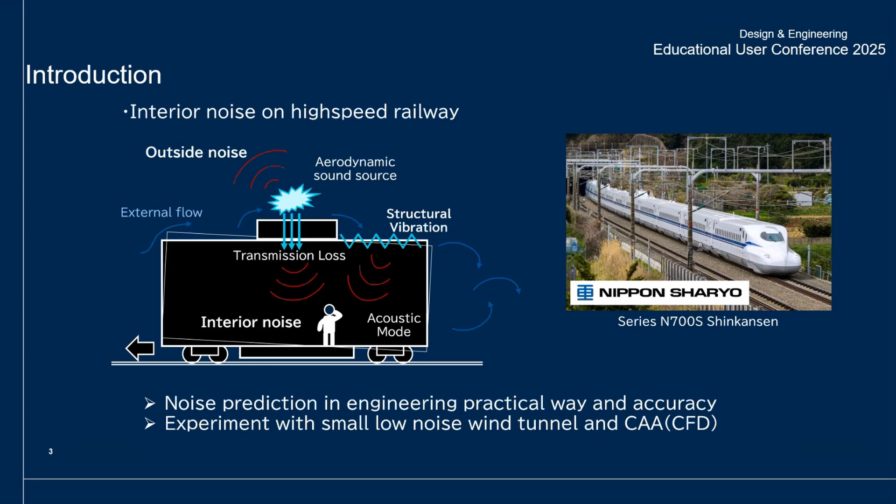Okay, figure 1 shows the experimental setup in a small low-noise wind tunnel. So this is a self-made wind tunnel in my laboratory. The goal of this study is to investigate how aerodynamic noise generated by external flow caused by various obstacles, such as roof-mounted equipment, affects the noise propagated inside a box-shaped model.

The wind tunnel used here is a self-made semi-Göttingen type tunnel with a nozzle size of 130 by 130 millimeters, maximum airflow velocity of 45 meters per second, and a background noise level of about 65 dB(A) at maximum speed. An obstacle was placed directly in line with the nozzle, and the bottom of the obstacle was supported by the top plate of the box representing the interior of a vehicle.

The airflow passed over the top plate surface, so only the obstacle was directly exposed to the wind. To simulate how aerodynamic noise generated outside propagates into the interior, microphones and accelerometers were installed inside and outside the box, as well as on the top panel. Sound-absorbing materials were also placed inside the box to prevent resonance from internal acoustic modes from dominating the actual phenomena.

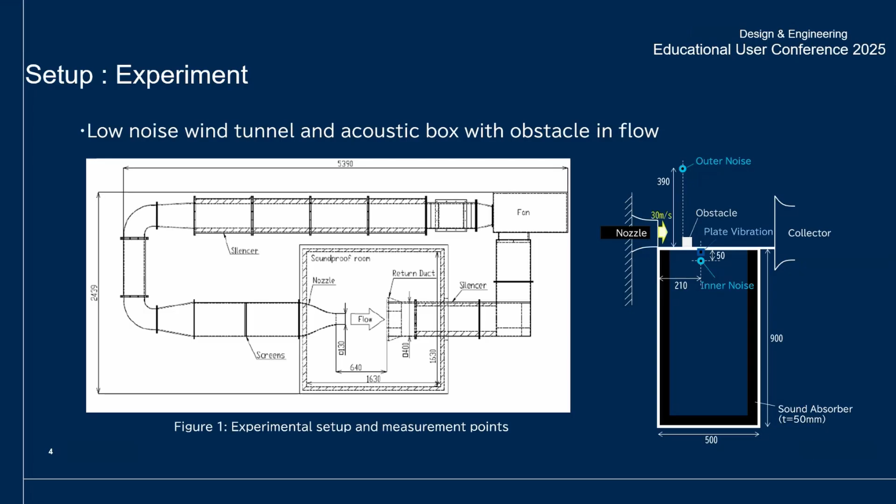And figure 2 and table 1 show the list of obstacles tested in this study. The obstacle shapes were based on a rectangular block with dimensions of 40 millimeters in length, 80 millimeters in width, and 40 millimeters in height. A 20 millimeter fillet was added to the edges. Several variations were tested and compared in front of the wind tunnel nozzle. From our previous experimental studies, we confirmed that the influence of obstacle shape can be clearly observed in the box's internal noise.

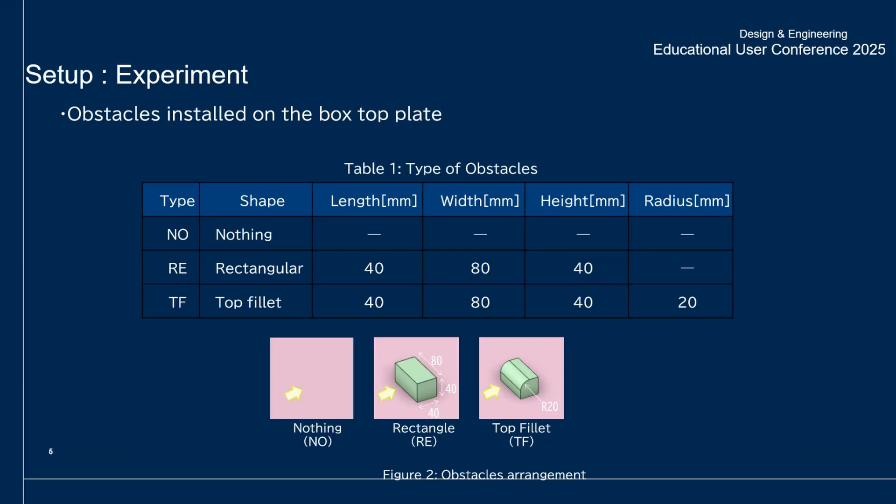Okay, this is the simulation setup. Figure 3 shows the numerical model used in this study. In this work, the CFD results were used as the aerodynamic sound source for the computational aeroacoustics (CAA) analysis. Therefore, CFD and CAA were calculated separately.

For the CFD model, on the left-hand side, only the region above the top plate, where the airflow mainly passes, was reproduced from the experimental setup. The airflow velocity was set to 30 meters per second.

For the CAA model, the area around the obstacle on the top plate was extracted as the fluid noise source region. The sound-absorbing material inside the box was modeled using three-dimensional elements with Biot parameters such as flow resistance to represent its acoustic properties.

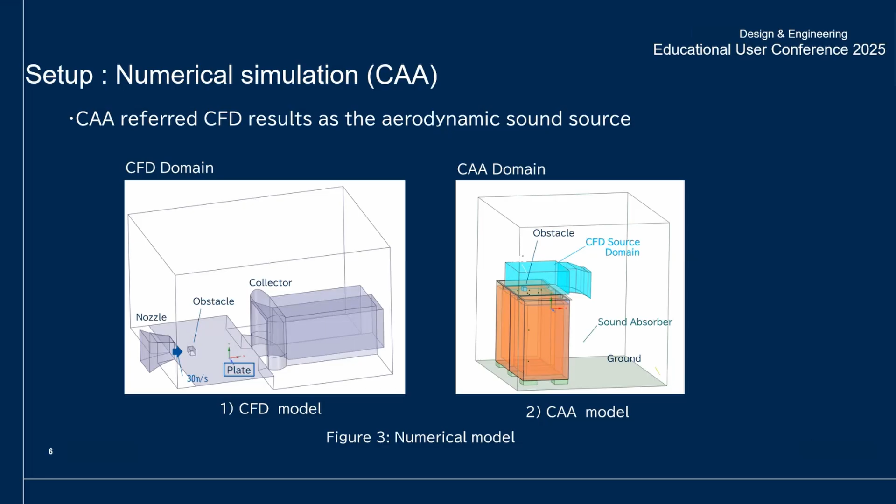Table 2 shows an overview of the simulation settings. In this study, OpenFOAM was used as the CFD tool, and Actran was used as the CAA tool. The main coupling method between CFD and CAA was SNGR, which stands for stochastic noise generation and radiation.

In this study, two approaches were compared. The first one is SNGR, a simplified method that generates the aerodynamic sound source using random fluctuations based on the average turbulent kinetic energy obtained from RANS.

Okay. The second is the normal CAA method, denoted as NCAA, which creates aeroacoustic sources from time series data obtained by LES, large eddy simulation, using the discrete Fourier transform. Actran provides a utility that allows aeroacoustic sources to be reconstructed from the CFD result and mapped onto the source region defined in the CAA model.

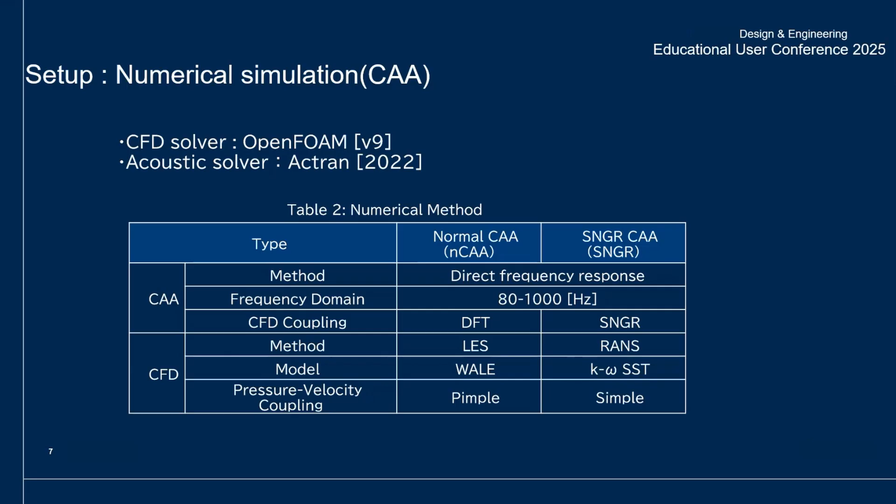Okay, let's talk about the results and discussions. Figure 4 shows a comparison between the experimental measurement and the analysis result in order to confirm the reproducibility of the prediction. With the NCAA method in the green line, both vibration and interior noise were predicted quantitatively well.

However, exterior noise, the outside noise, was overestimated, suggesting that not all of the fluid excitation components in the actual phenomenon are converted into sound.

On the other hand, with the SNGR method in the red line, the exterior noise matched the measured data well, but both vibration and interior noise were underestimated. This is likely because the vibration, which represents the fluid excitation component, was underestimated, and the SNGR method does not theoretically model the excitation effect.

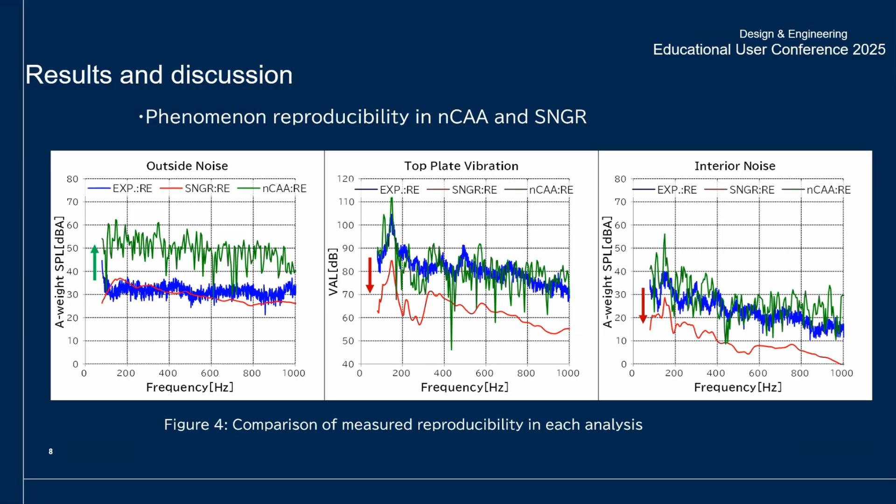Next, Figure 5 shows a comparison of the results with and without the top fillet. This is the comparison of the obstacle shape. Here, we examined whether the influence of the obstacle shape could be predicted in each simulation. For the interior noise, the noise around 160 Hz, circled here, which corresponds to the structural mode of the top plate, became dominant due to the excitation caused by the airflow.

When the top fillet was added, the fluid excitation component became weaker, and as a result, the level around the dominant frequency was reduced. Although there were some quantitative differences between the NCAA and SNGR results, both methods were able to predict the effect of the top fillet. From this result, it was confirmed that SNGR can be effectively used for qualitative prediction of the internal noise.

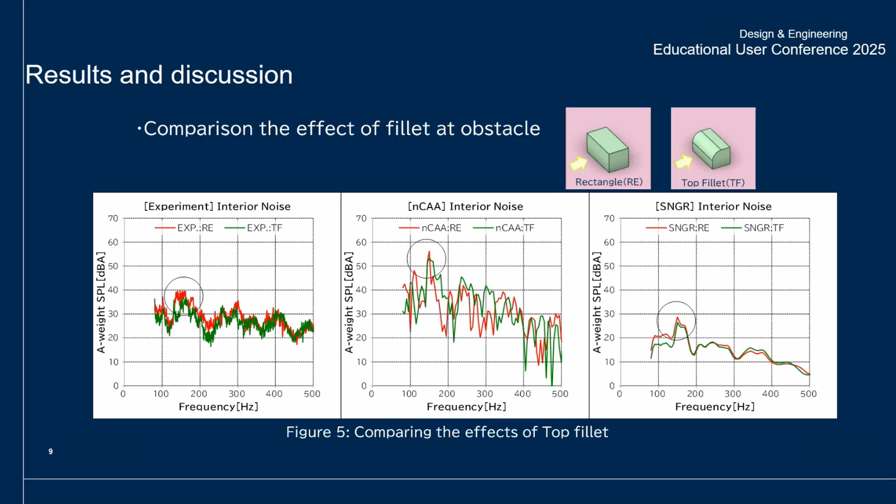Okay, finally, we evaluated the advantage of the SNGR method in terms of simulation cost. In this model, the calculation time was reduced to about 1/7 of the normal analysis, showing a significant improvement. This is because unsteady calculations were no longer required in CFD when generating the sound source.

However, the memory usage and storage requirements of the analysis PC increased compared to the normal method. This is because SNGR uses random fluctuations to generate the fluctuation component from the averaged flow field, which results in large sound source and analysis result files. To apply SNGR to real-world cases, for example, the analysis of railway vehicles, it will be necessary to optimize the setup to reduce memory and storage demands.

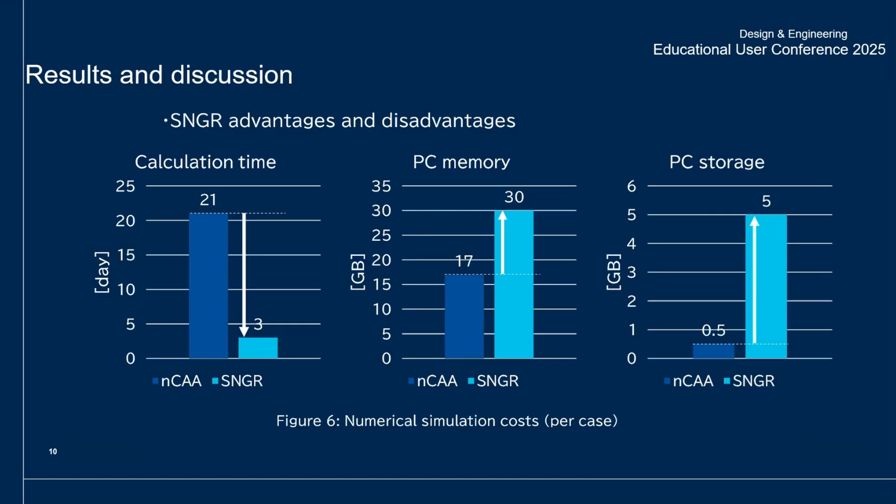Okay, to summarize, the accuracy of the numerical simulations was validated using experimental data. In the SNGR method, although some differences from the measurement were seen in the top plate vibration and the internal noise, the same overall trend regarding the obstacle shape was successfully reproduced. To verify these quantitative differences, the normal CAA method using LES-based sound sources was also performed.

It was found that the presence or absence of the fluid excitation component in the sound source significantly affected the acoustic result. For more accurate evaluations, it will be necessary to analyze exterior and interior noise separately. As for the advantage of SNGR, the analysis time was greatly reduced, demonstrating its efficiency. However, it also requires higher PC specifications, which remains a challenge for applying this method to full-scale vehicle analysis.

In future work, we plan to further improve the accuracy of the practical CAA method using this experimental model and to quantitatively clarify how flow-induced and flow-excitation noise from the external airflow propagate into internal noise.